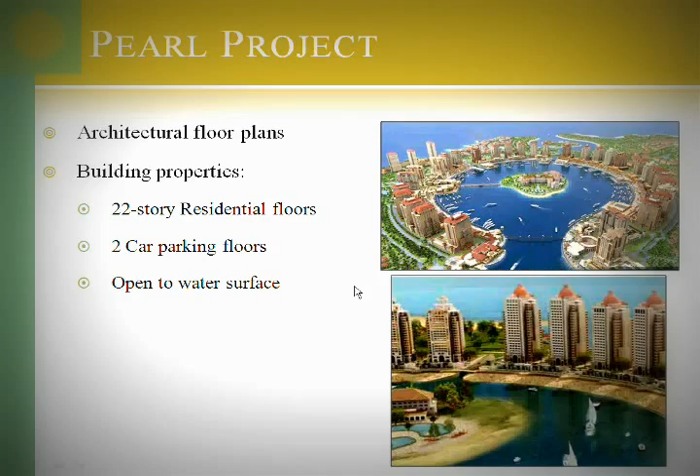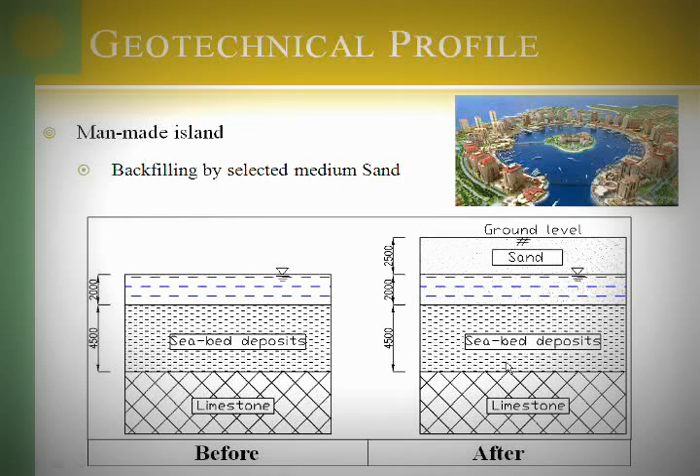This is a man-made island, exactly as shown in the before-lift picture. They filled that water with sand for around 2.5 meters. It was a seabed deposit, so to reach the rock, this layer was around 9 meters of sand to support your foundation, and this will be discussed in the foundation part.

We have 3 main parts in our graduation project: structural, foundation, and management. In the structural part, we did the design for the ribbed slab system in some floors, flat slab, shear walls as vertical members, which was a very important element, columns, stairs, ramps and bearing walls. In the foundation part, we analyzed the different foundation systems that may be used in this structure, and we showed how suitable each is for this building. Then we did a detailed design for the pile caps system chosen for this project. We also applied isolated and strip footing design in some small parts.

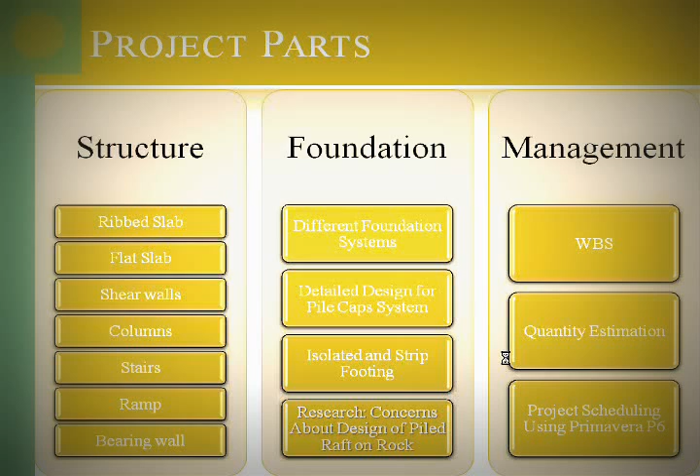At the end of the foundation part, we participated with Dr. Hisham in research about the concerns regarding the design of piled rafts on rock, which will be explained in this presentation. In the management part, we did a work breakdown structure for the building, the quantity estimation, and scheduled the project using Primavera P6, considering all the relations between the activities.

Starting with the structural analysis and design part, the design process mainly followed this diagram. First, we understood the architecture of the building, because we received a real design architecture with very complicated details, so we spent a lot of time understanding it. Then we moved to analyzing and designing the floor systems, the flat slab and the ribbed slab. After that, we developed the 3D model for the tower using ETABS, and checked the 3D model stability using stresses, effects on the foundation, and lateral drifts and deflection.

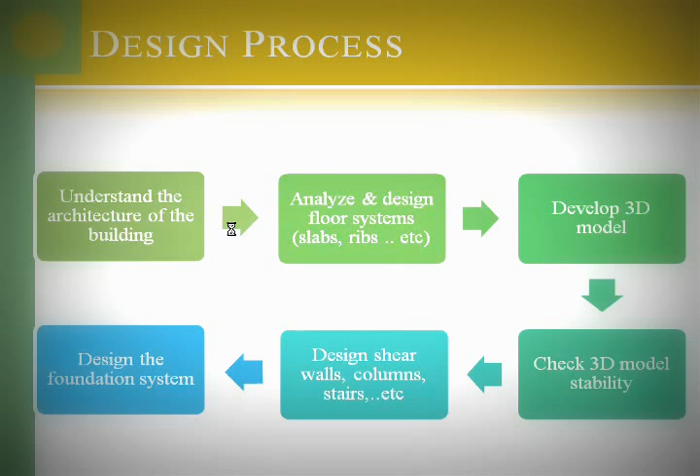After ensuring the structure as a mass was adequate for stability, we designed the vertical members, the shear walls and columns, and special elements like stairs or ramps. After finishing the superstructure design, we moved to the substructure design, the foundation system, which will be part 2 of this graduation project presentation.

I will move through the steps of the graduation project to show where we are. In the architecture stage, we understood the AutoCAD plans and concentrated on the main part that connects the structure with the architecture: the columns, their sizes and locations. From the architecture drawings, we got the design loads, which were used in the analysis of the slabs.

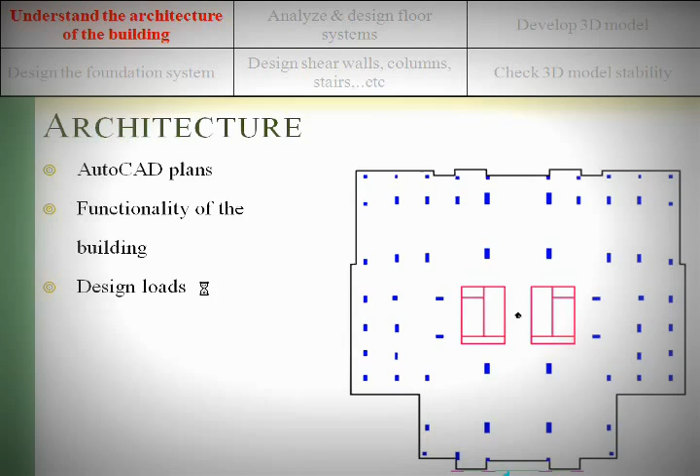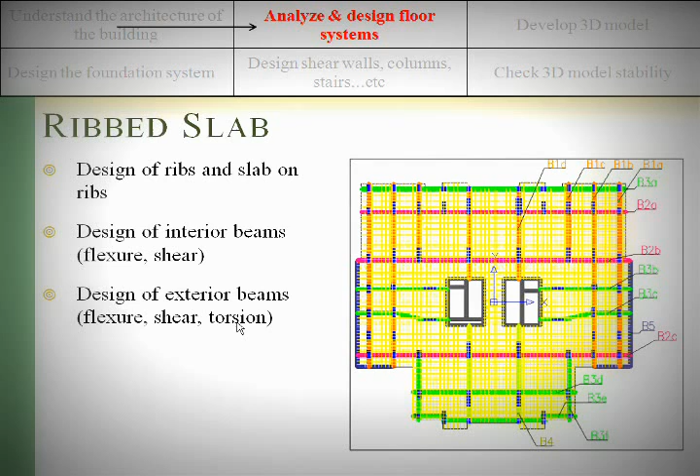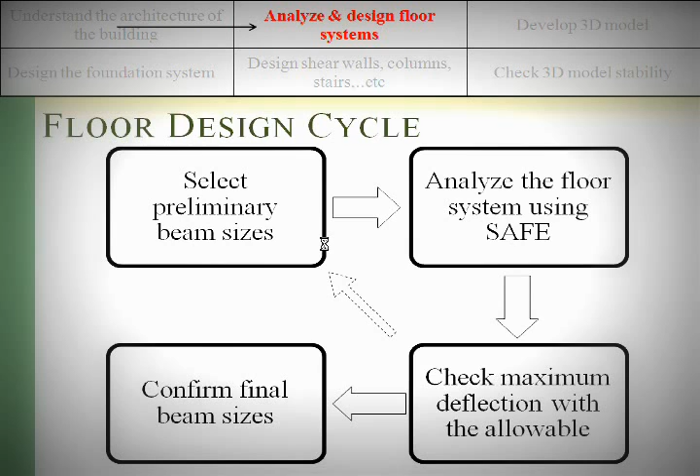We started to analyze and design the floor system. The first one was the ribbed slab, designed with different ribs and beams. The ribs were supported by the main beams; some beams were designed for flexure and shear only, and some, the perimeter beams, were also designed for torsion. The floor design cycle started by selecting preliminary beam sizes, analyzing the floor using SAFE, checking the maximum deflection against the allowable, confirming the beam sizes, and then proceeding to reinforcement. This is the SAFE analysis and the ribbed slab system used in this floor.

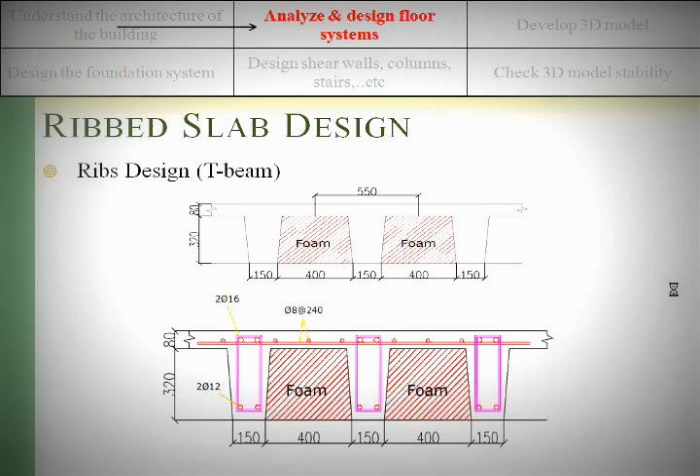This is the general detailing of the ribbed slab. It was designed as a rib, as a T-beam. This is a sample of the exterior beam, which was designed to resist flexure, shear, and torsion.

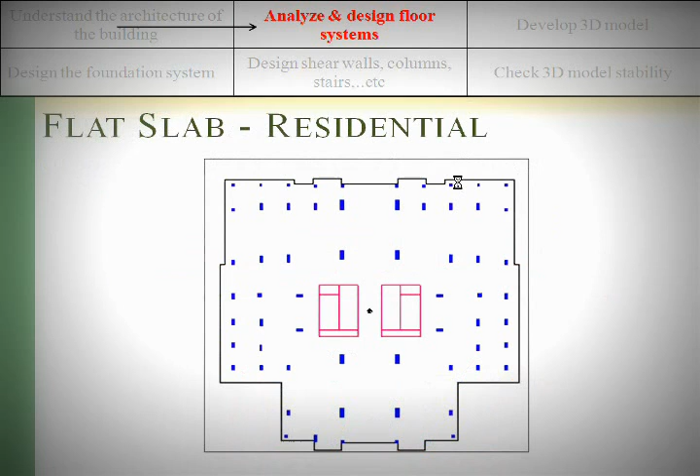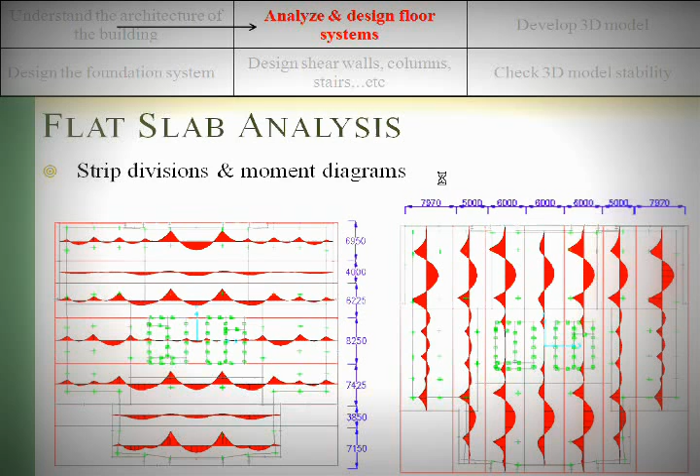This is the next slab system, which is the flat slab residential system. You can see the strips that we have divided to design the flat slab. Actually, we have an irregular shape, so we use SAFE to analyze the strips.

Also, for the punching shear check, we get the critical points, and then we check it manually to know if the slab will be adequate to resist the punching shear. This is a general detailing of a section of the flat slab.

For the 3D structural system, this is the important part. We have designed it for wind, and the main member to resist the wind was the shear walls. This system was mainly used because we have huge shear walls compared to the columns. So we have neglected the rigidity of the columns, and we consider that the rigidity is connected with the diaphragm action to the shear walls only. And the columns have been assumed to be a pinned end.

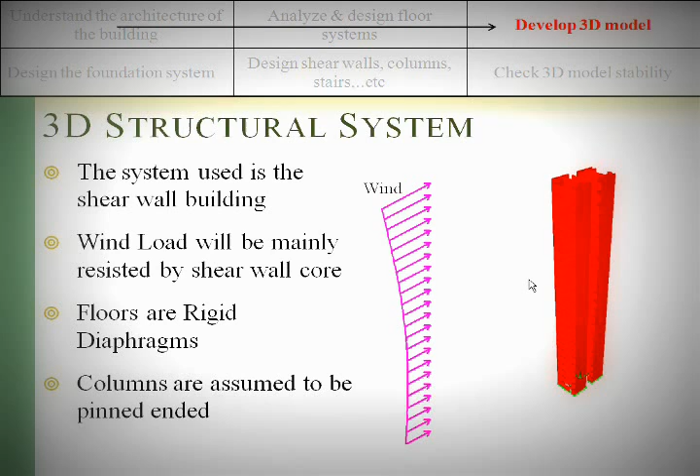This assumption is debatable, but some professors really agree to assume the concrete connection, which is not detailed with special detailing, as a pin. If some structures need special detailing for a rigid beam-to-column connection, I will present that in a different presentation, but assuming a pinned column is more conservative.

Why should we do a 3D modeling? This is the question that is always asked. Why should I make a 3D model? First of all, to check the stability of the structure, the deflection and drift values, and to get the column loads and shear wall loads when the wind is applied. Also, if you are applying seismic, or blast, or any other load, the results will be different if you analyze it as 3D versus 2D.

After that, we will get the reactions, and we will transfer them to the foundation system.

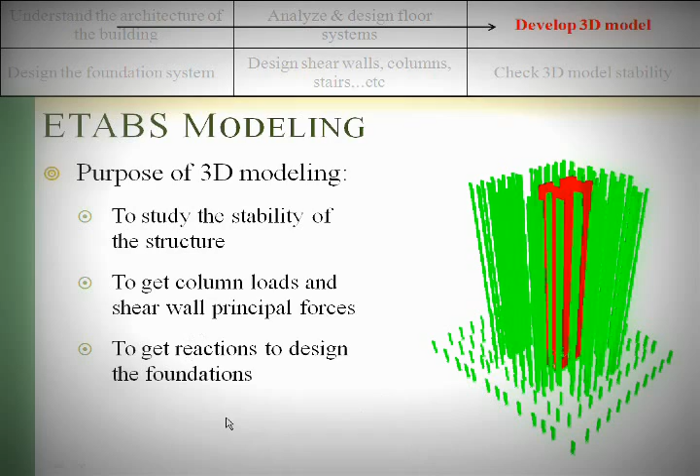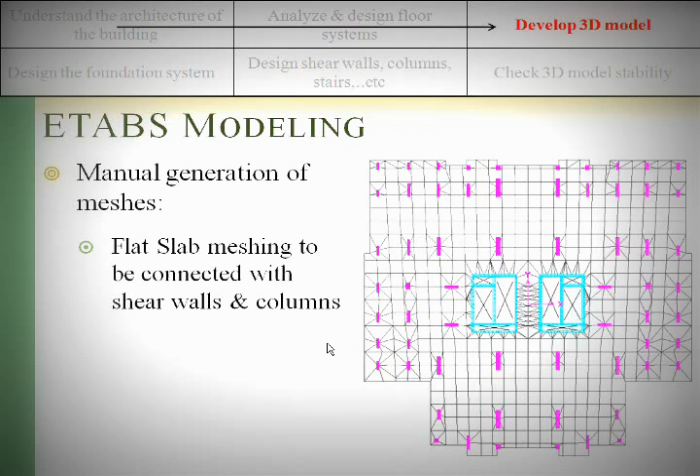The ETABS modeling was a very important part of our presentation, our project, because we have used manual meshing to mesh the slabs and connect them with the columns and the shear walls. This was a very important step to assure that the finite element software is working properly.

In the ETABS modeling, we also used the piers and spandrel system, where the spandrel transfers the load horizontally to the piers, and the piers act as vertical members to take the loads down to the floors below.

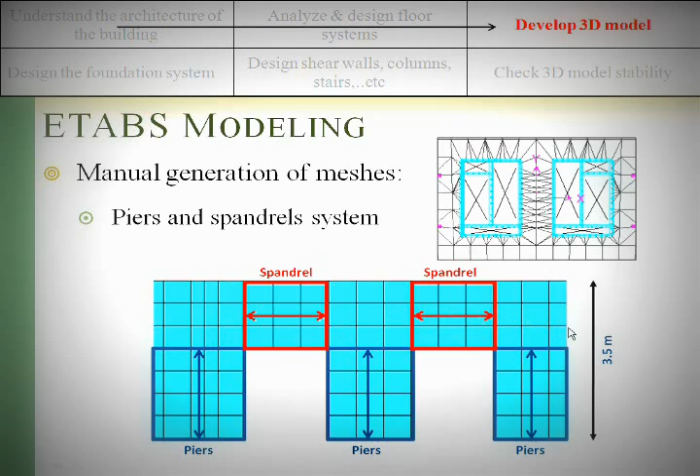The load combination that we have taken is based on ACI 2005.

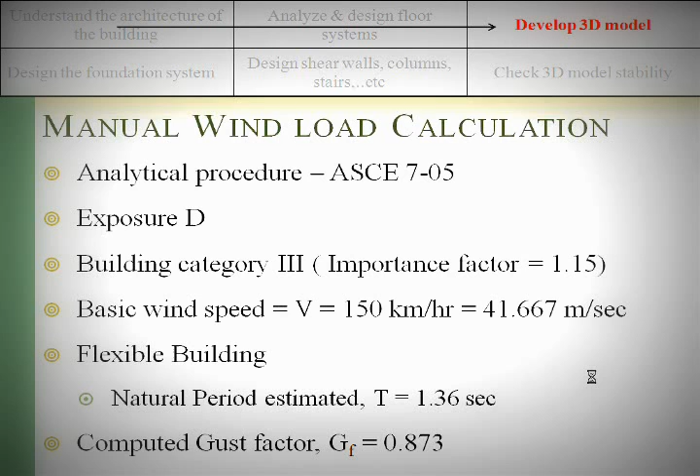In the manual wind load calculation, we have taken exposure D because the structure was open to the water surface, and we have taken the building category as 3 because the importance factor is 1.15, since it will be full of people. The basic wind speed, as discussed with major consultants in Qatar, is 150 km per hour, or 41.7 meters per second. Because the building is around 23 stories, it was empirical to calculate that it's a flexible building in the dynamic analysis, and the natural period estimated was 1.36 seconds. The computed gust factor was equal to 0.873.

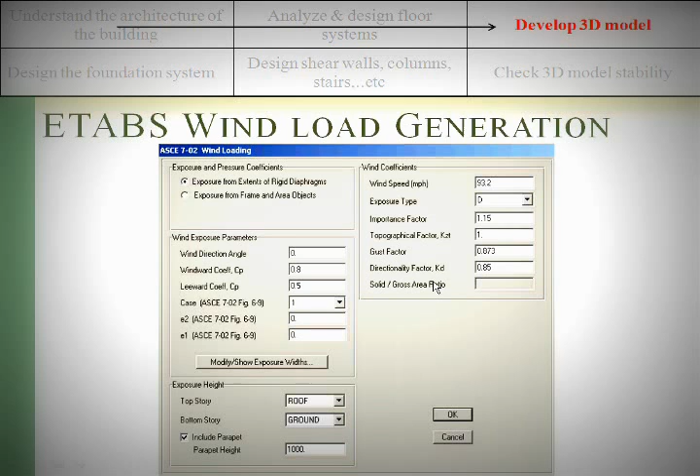ETABS generates the wind load automatically, so we used the ETABS command to check our manual calculations, inserting the CP windward and leeward coefficients. We considered only one case, the most probable and critical case, taken from the ground to the roof including a parapet of 1000 millimeters, with the wind speed chosen in miles per hour, along with the exposure, gust factor, directionality factor KD, and topographic factor KZT equal to 1.

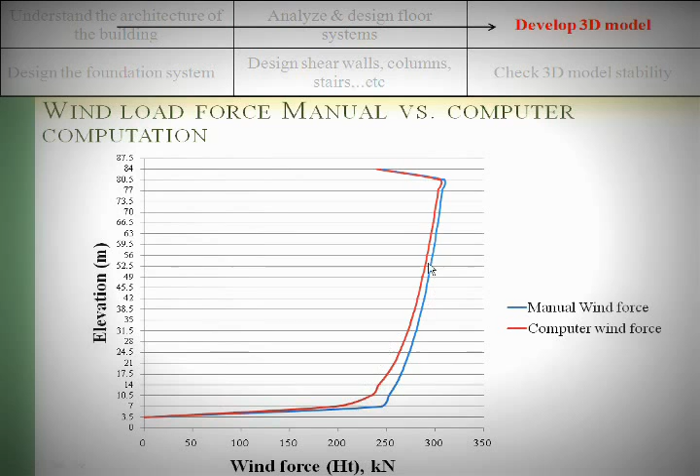This is a comparison between the manual and computer wind analysis calculations. You can see this axis is the wind force per floor in kilonewtons, against the elevation. As you can see, the values are very close, and this is why we are assured that our values and results are true.

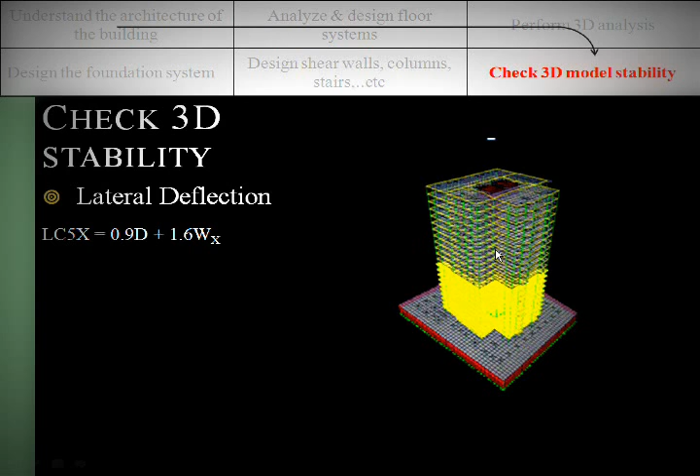Also, after that, we can check the lateral deflection check, the drift, with the maximum deflection per the total height. The maximum deflection we get is around 56 millimeters over the 84 meters, and the ratio is less than the 1/500 specified in the code.

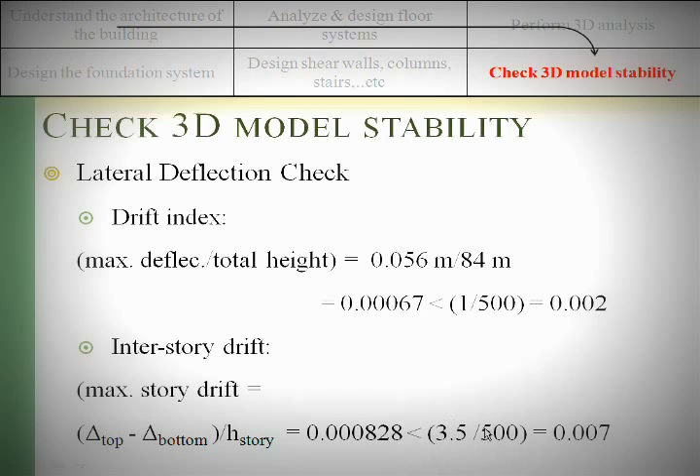We have also checked the interstory drift, which is the maximum deformation at the top of the story minus the deformation at the bottom of the story, divided by the height of the story. You get this value, which is 0.00082.

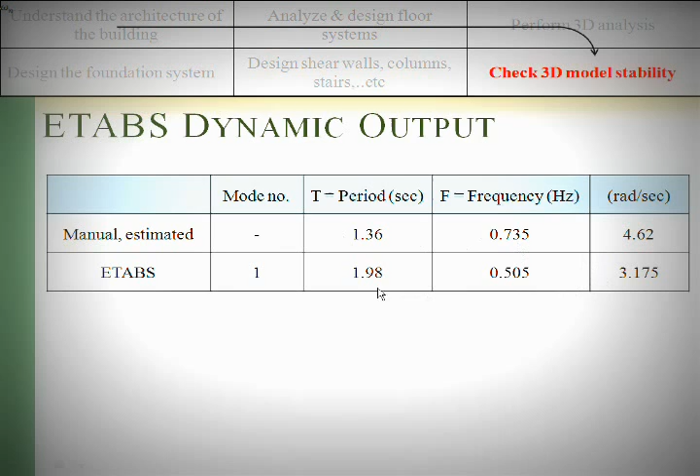This is less than the interstory limit, which is the height over 500. This is the dynamic output from ETABS. It gave a period time of 1.98, which is more than what was calculated using the empirical calculation. This is because ETABS considers all the geometry of the building in its analysis, so the period is usually bigger in finite element software than in empirical values.

Now we reach the design of the most important part. As you can see, we have understood the architecture, analyzed the design and the floor systems, performed the 3D analysis, and checked the 3D model stability.

After that, we move to the vertical members, starting with the major part of this building, which is the shear walls. We divided them into different piers, but it was designed as one core, considering all the loads and all the principal forces.

We consider the axial load coming to each pier, the moment on the strong axis, the moment on the weak axis, the shear in the strong axis, the shear in the weak axis, and the torsion. To design all of these values at once for each floor, for each pier, for each load combination, would take an enormous amount of time to present.

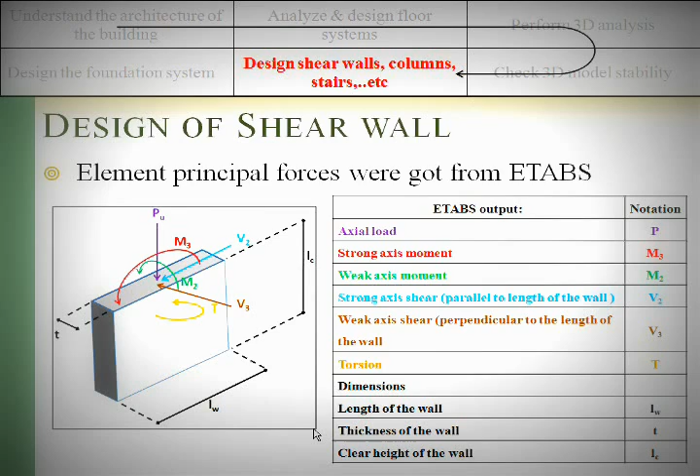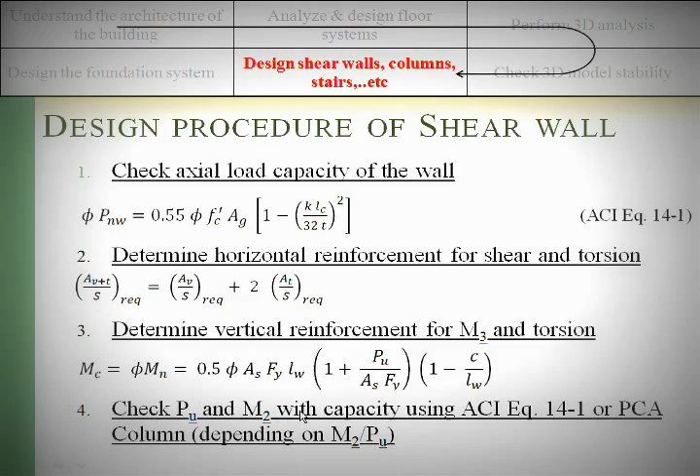So this is why we put in all the equations used in the design to check the axial load capacity and determine the horizontal reinforcement. Using this horizontal reinforcement we can determine the vertical reinforcement using the maximum moment, the strong axis, and the torsion. After that we can check the axial load with the weak axis moment to see if it is covered or not.

To do this, we developed a macro function. It was a very unique Excel function, easy to use to import the data from ETABS for all the principal forces and copy it into equations that design the shear wall for each floor, for each load combination.

It's not always critical to take the maximum axial and maximum torsion, maximum shear, maximum moment, because sometimes the axial load is helping the design of the shear. So we have to design it case by case, load combination by load combination, story by story.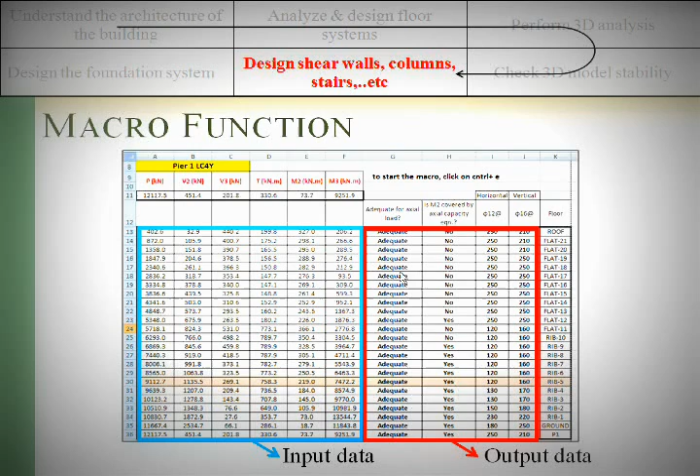This is why we developed this macro function, and it was very efficient to give a huge amount of data in a very fast time. We analyzed the shear walls using ETABS, exported them as a text file for all load combinations.

Then we copy all wall forces into an Excel file, which is prepared to take this text file from ETABS. These forces are copied into the macro function for each floor, for one load combination, and then we run the macro and get the design results.

We apply this for all load combinations and then take the largest amount of rebar depending on the load combination. We group the floors according to the rebars and go for the detailing.

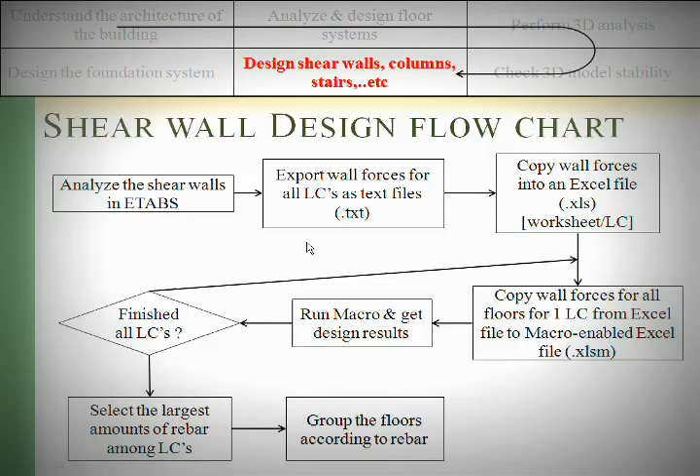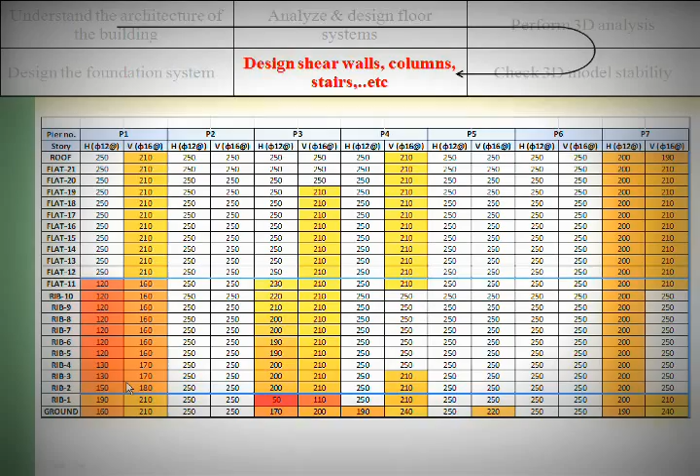Now we reach the column design. We designed the columns as pinned columns, and this assumption is very conservative because you are taking all the loads to the shear walls.

We had a lot of discussion about this, and we will have a separate presentation clarifying the problem of rigid connection versus simple connection for the beam or floor-column connection, and why we can or cannot use a pin column connection in concrete structures. This will be displayed in a separate presentation.

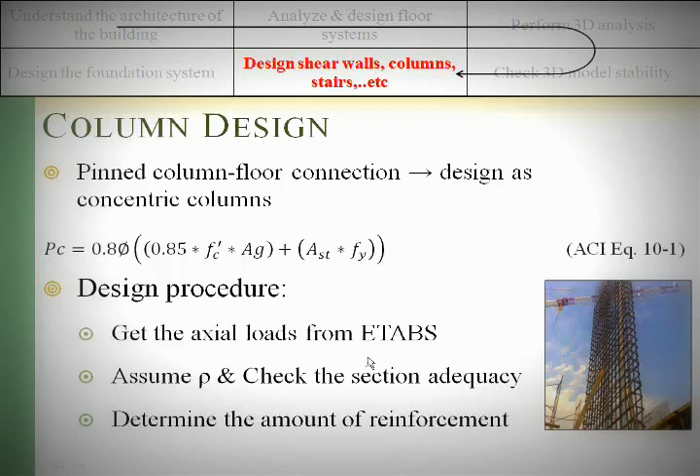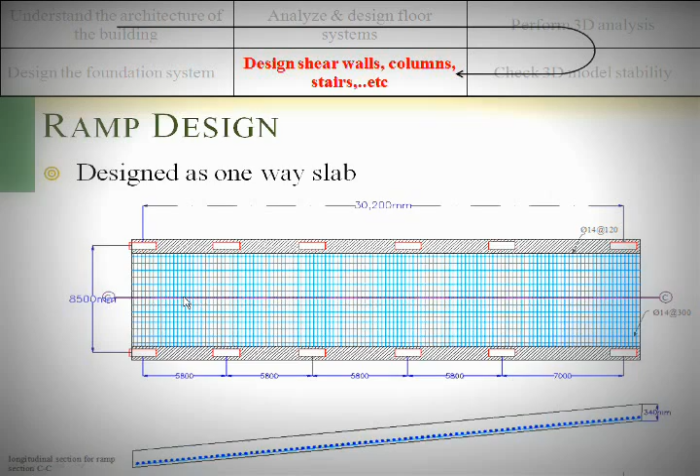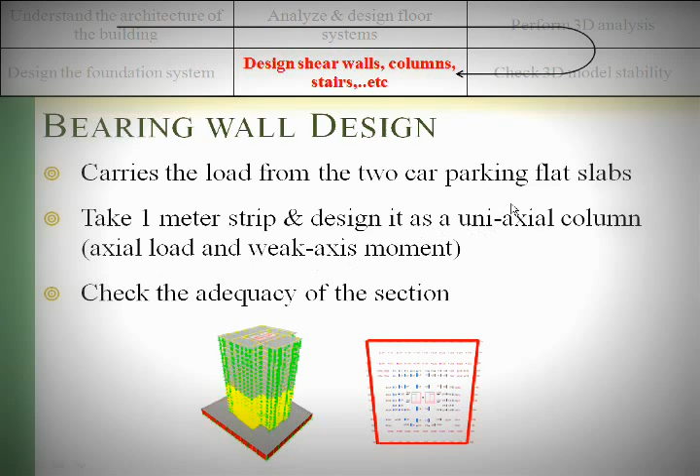We have also designed one of the bearing walls. This bearing wall was surrounding the building. It was designed for a moment on the weak axis per meter, and this is the general detail of this bearing wall.

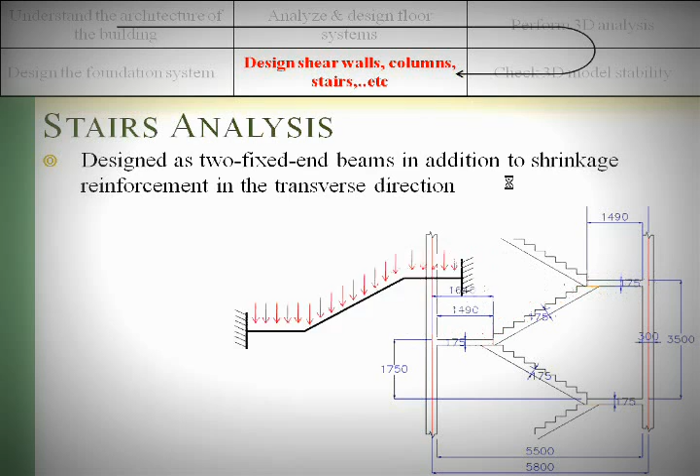The stairs was a very nice structure, which we consider as fixed with the shear walls in order to minimize the moment, and we get the negative and positive values using STAAD software, then we design this stair as a continuous beam supported on the shear walls.

As you can see, this is the negative reinforcement that is detailed in a very correct way, because we have to make sure that all these junctions are available and able to resist this tension.

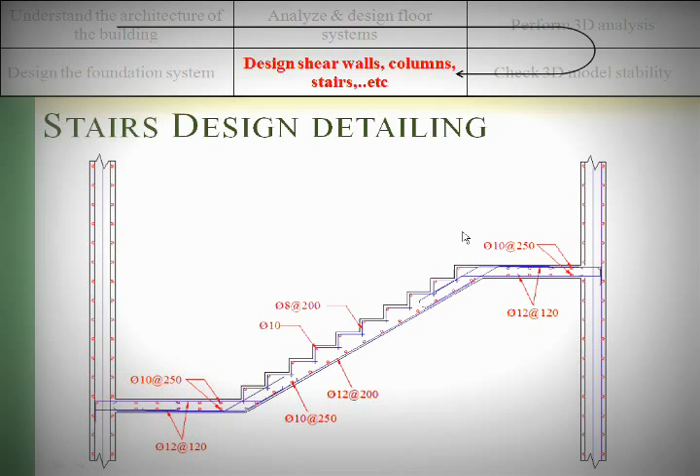Now we reach the foundation analysis and design part. Mainly we have 4 divisions in this part.

The first one, we will explore how we checked the foundation system for the tower. We have checked the raft only, and we showed if it is available or if it will be okay to design as a raft or not, and then we will go for the pile raft, and then we will use the pile cap system, and it will be illustrated.

The car parking foundation system, which is just a 2-story building, we have used the isolated footing and strip footing. And in the research part, we check the pile load share research, which describes the concerns about the design

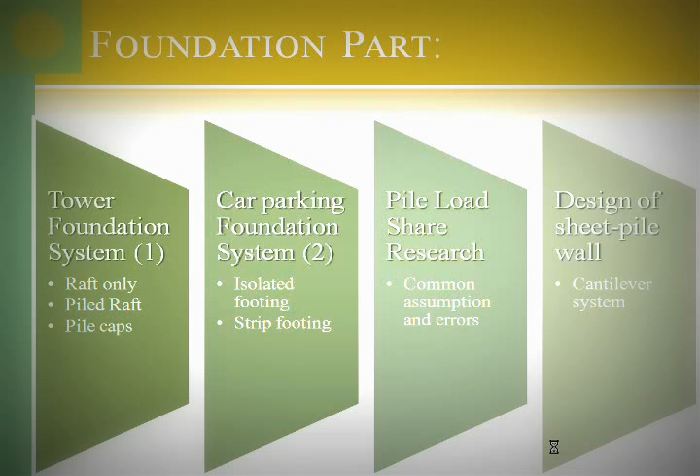of a pile raft on rock, or on piles that are socketed into rock. It will explore the concerns and errors that can occur in estimating the subgrade reaction and the pile spring constant. As a final part, it will be the design of the sheet pile wall, which is

using the cantilever system. Here, as you can see, this is the tower area, and in this tower area you can see that we will use the high capacity foundation system, and this is the car parking area, which uses the spread footing and strip footing for the foundation.

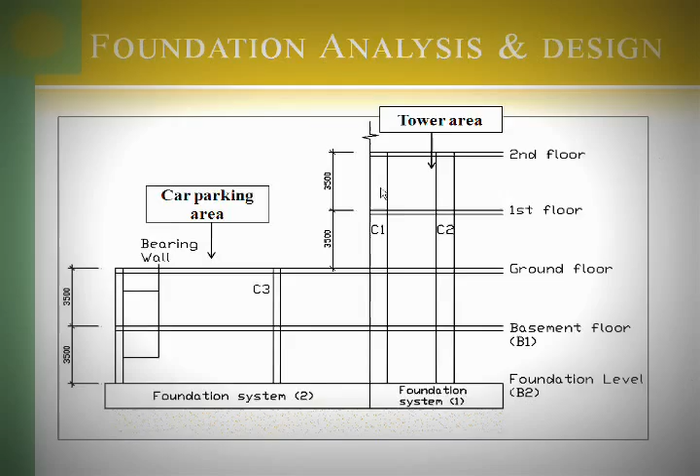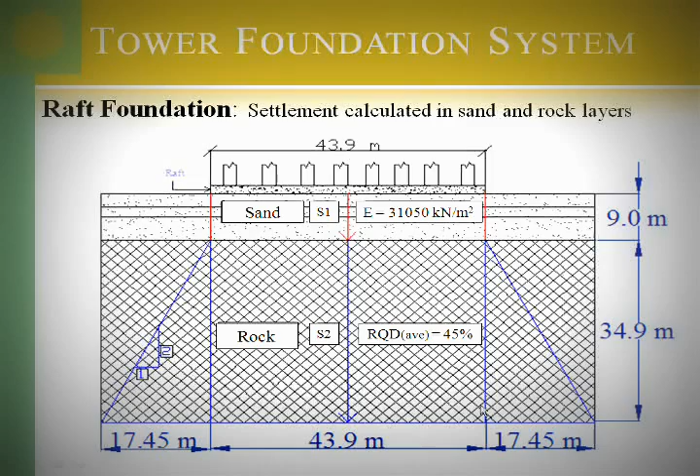For calculating the raft foundation, if we want to do a raft, we have to check the settlement. We assume this is sand because it's a man-made island, and we have about 9 meters of sand. Then the rock starts with an average RQD of 45%. When we check the settlement, the sand settlement was 7.1 centimeters and the rock settlement was 8.5 centimeters.

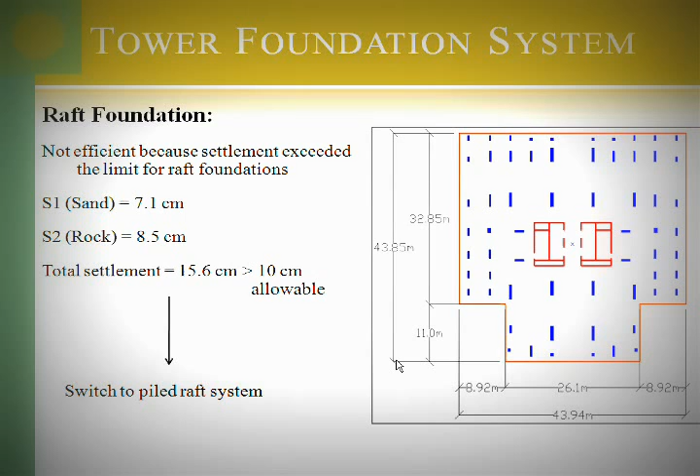The maximum allowable settlement in the raft is 10 centimeters, and it will not be allowed to use the raft foundation in the system. We showed all the details and calculations to show that it will not be adequate for this system, so we switched to the pile raft system.

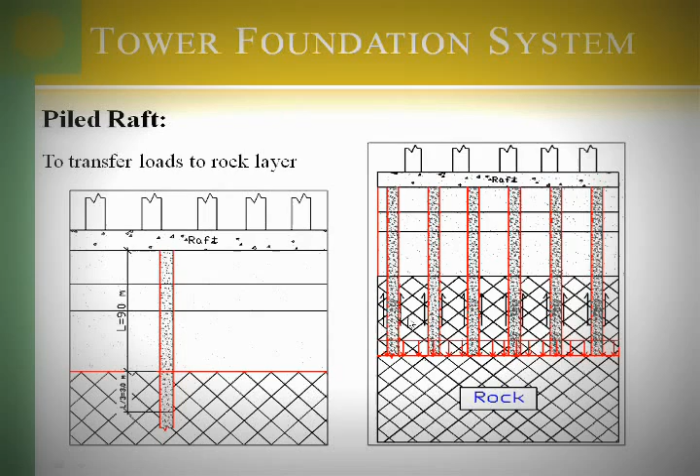The pile raft system: the first step in the procedure is that we have to calculate the pile capacity. To calculate the pile capacity, we have to know what rock is surrounding it and the friction with the rock, and how we are going to transfer the load of the raft using the piles to a

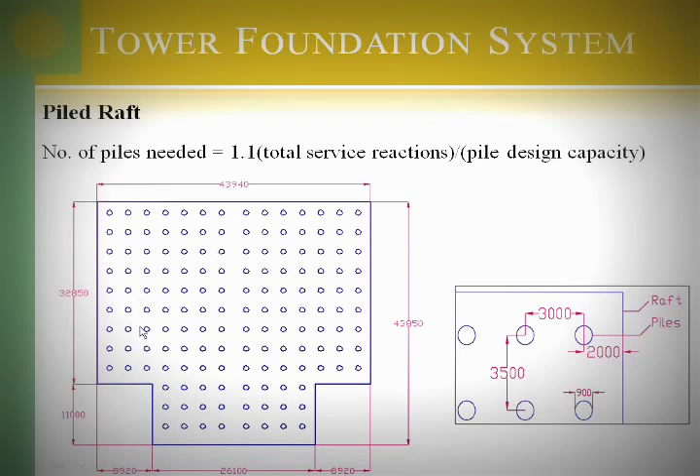stiffened strata of the rock. To estimate the number of piles, if we want to use just a conventional pile raft, we will know what the total service reaction is, and divide it by the pile design capacity. We can check how many piles, and we distribute it equally.

But we had a problem: some of the columns are concentrating more load on some piles than others. For example, if we take this column, it's putting more load on this pile, so this pile is not adequate, and it is not distributing the load of this column to all piles, even if you used a rigid raft.

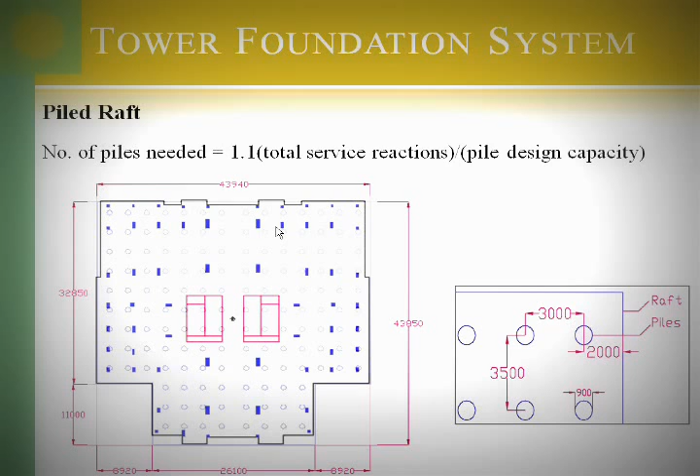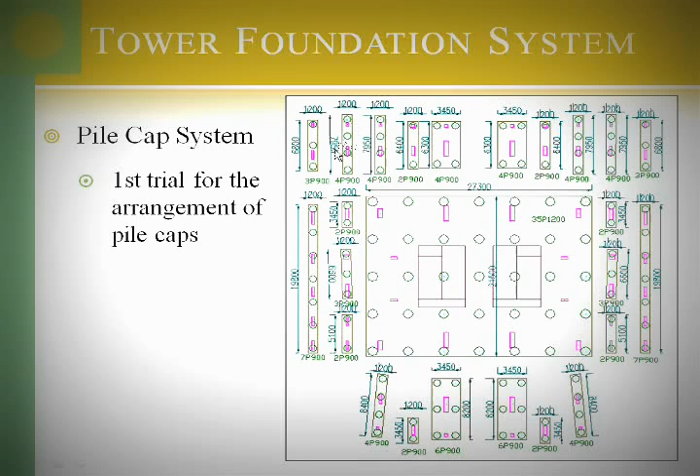So we tried to go to the pile cap system. The pile cap system allows you to group the columns. We use the middle raft to take the shear walls and the major columns, and distribute it to the piles, and for the other columns we can put the pile cap system for each column. Also, we have some problems with this.

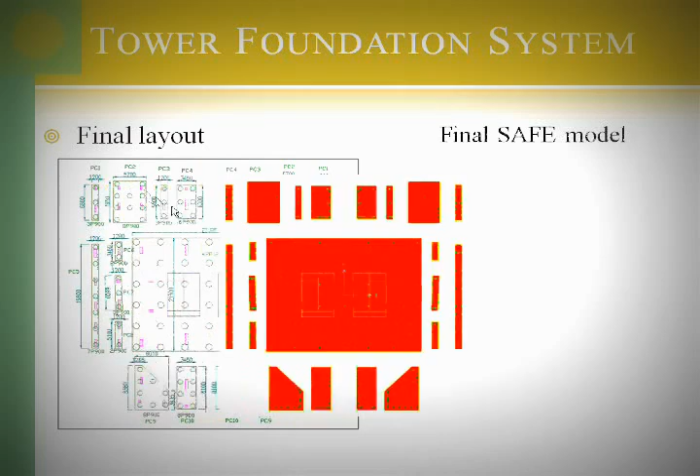We have to increase the thickness of the pile cap, or increase the number of piles. The final layout that we reached, with the number of piles for each column, as you can see here, will be a raft with a 50 centimeter border surrounding these pile caps.

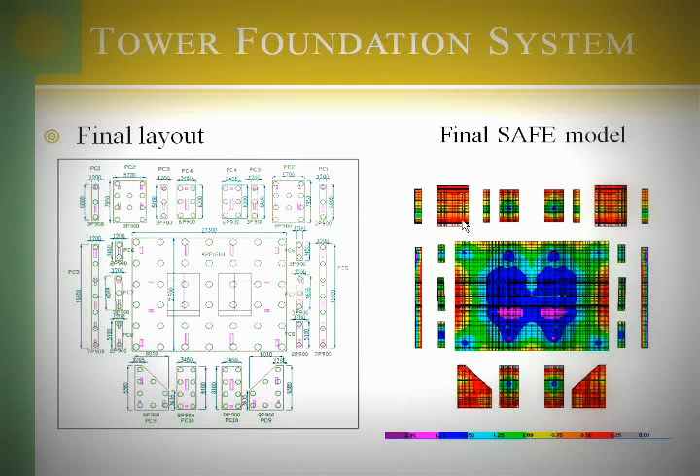This is the SAFE model, and we have checked that the reaction coming to the pile is less than the pile capacity, and this will be an adequate design.

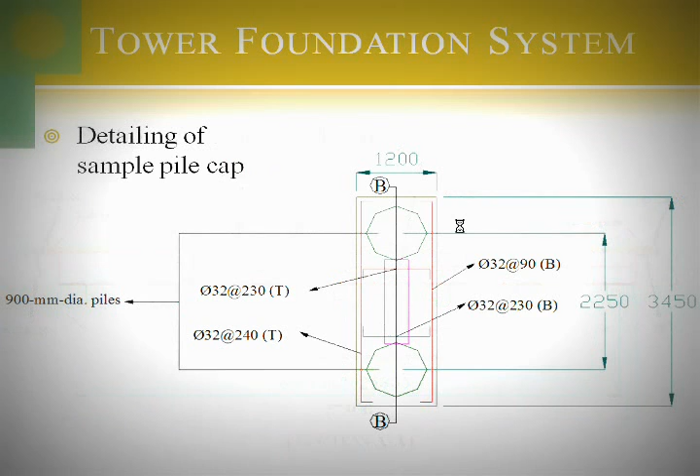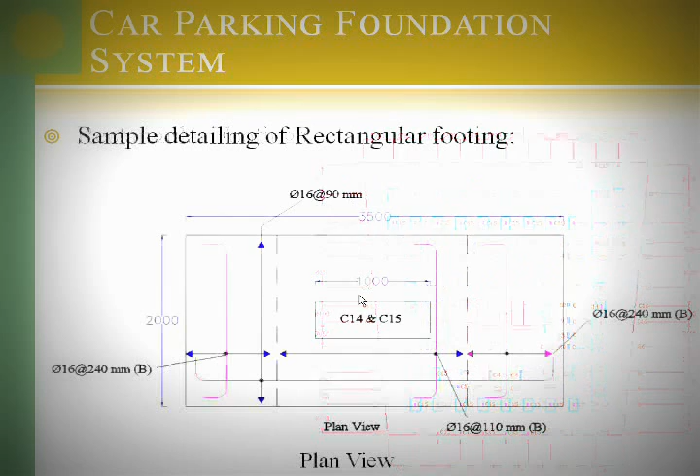We have used rectangular footings, and these footings were surrounding the car parking area. This is a sample detailing of the rectangular footing.

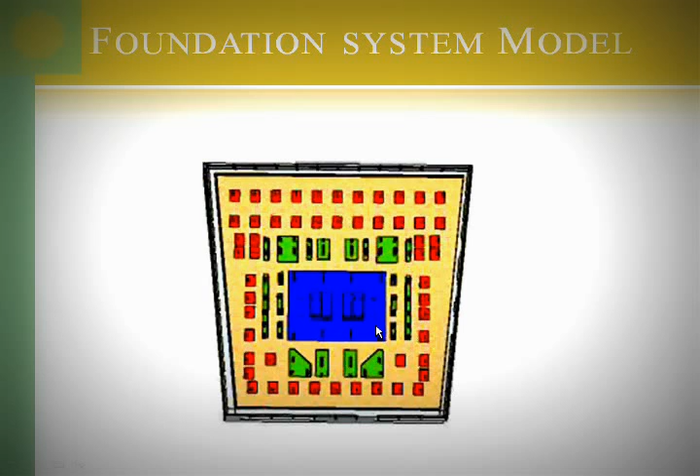We have also used a wall footing for the bearing wall with a very simple method for designing the strip footing. A video was prepared in the graduation project to model the foundation system in this structure, and it will be shown in a separate video.

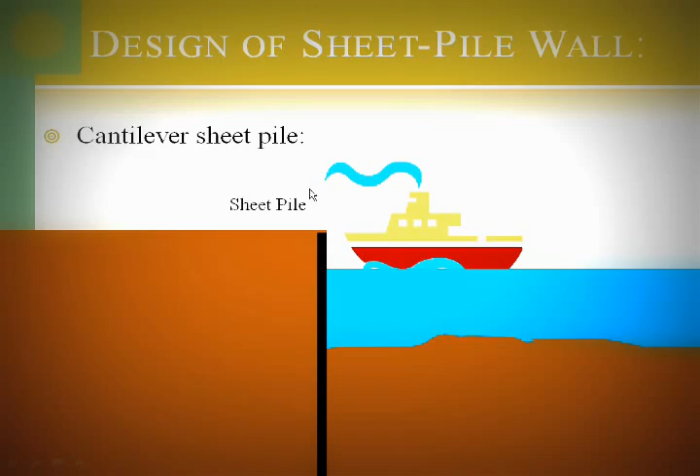This is the cantilever sheet pile. We have proposed that we can put a sheet pile to resist the soil, and we can use this system as a marina. This sheet pile can be very easily analyzed using the earth pressure calculation. As you can see here in the figure, we can calculate the earth pressure from the soil and the water, and we design this sheet pile as a cantilever sheet pile.

We have chosen to do this sheet pile as contiguous piles because we are not required to make it impermeable. We can let the water go because it's already surrounding the pile sheet.

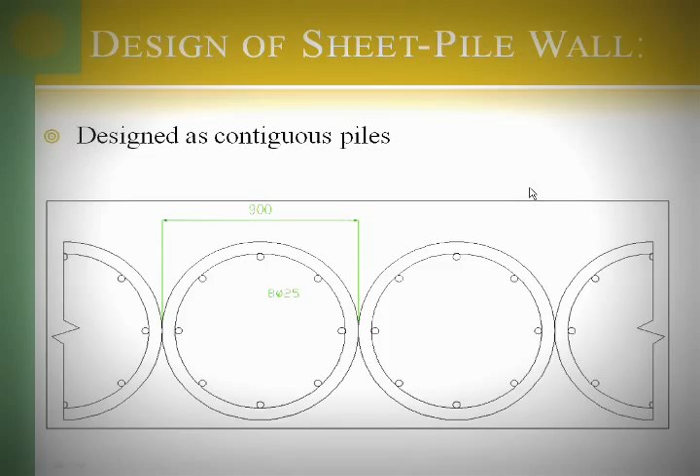Now we have reached the research and geotechnical concerns about the design of the pile raft on rocks. We know that we have two concepts in the design of the raft on piles. The first one is the conventional concept, which assumes that the stresses coming from the raft are distributed to the piles directly, with nothing sharing the loads from the surrounding soil or rock.

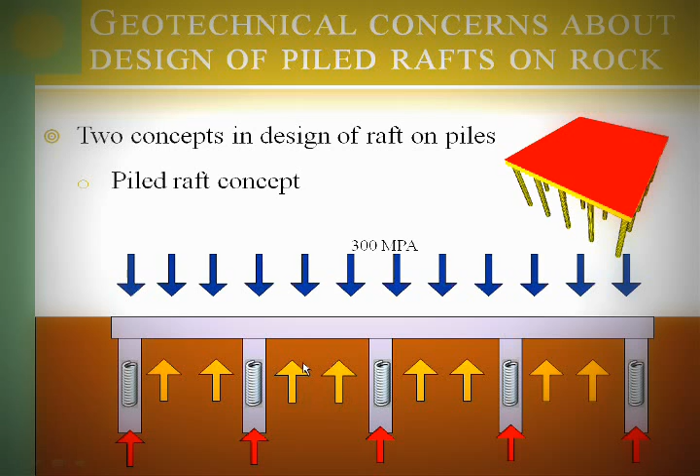The other type is the pile raft concept. The pile raft considers the spring constant of the pile and the subgrade reaction of the rock. In these two models for this raft foundation, we are assuming the modulus of subgrade reaction, and we are assuming the pile spring constant.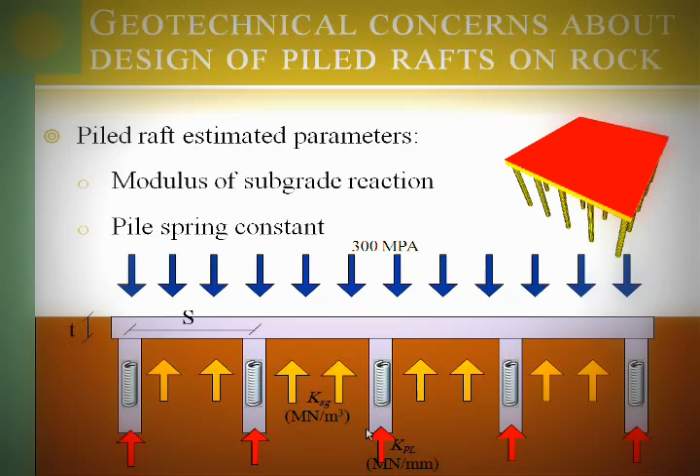These values have some ranges, and if we assume them in some way, we can affect our design. This is what the research is exploring.

What we did: we know that the subgrade modulus of the rock, for example, ranges from 150 to 300 in Qatar, and the pile spring constant ranges from 4.5 to 9 meganewtons per millimeter, depending on the RQD of the rock surrounding the pile. We used some raft foundations with a spacing of 3D up to 6D.

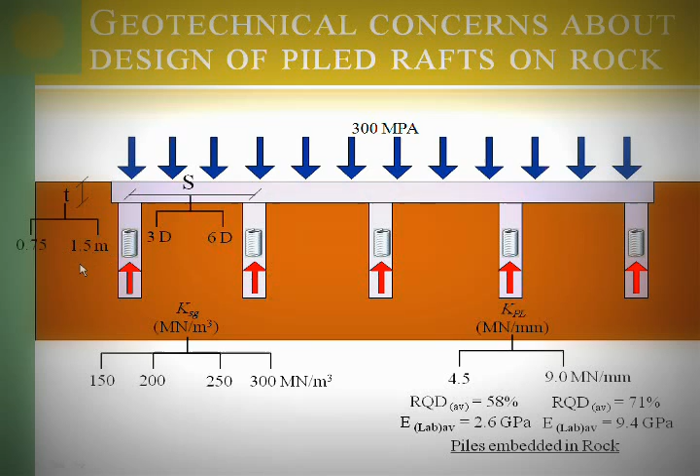We can use a thickness of 0.75 or 1.5 to model or simulate the thickness of the raft, whether it's a rigid raft at 1.5 or a flexible raft. We have considered two types of piles.

The piles which are embedded in the rock, fully embedded, as in the case of Qatar in the Corniche. Depending on different RQD values, we can get different pile spring constants.

There is another type, the pile that is socketed into the rock, which is the system used in the strata of other countries, not here in Qatar. Some areas like the Pearl Qatar or the New Doha International Airport have this same type of pile, but in the Corniche area the piles are fully embedded in the rock.

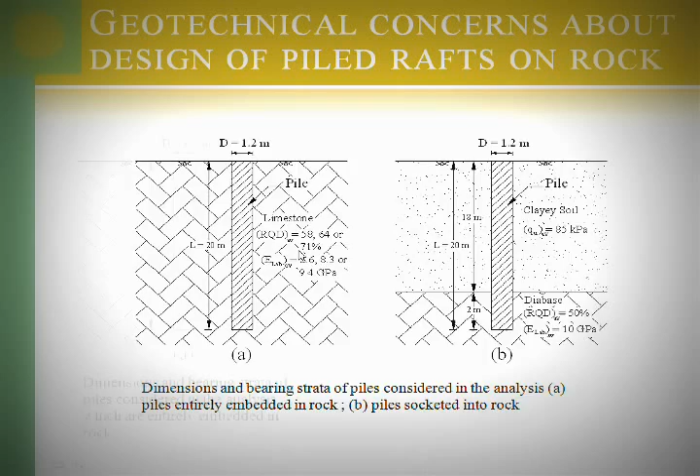We have taken this spring constant and checked all these values for all cases, to describe the errors that can result from overestimating or underestimating either the spring constant or the subgrade reaction. To calculate the pile spring constant, we can go to the pile load test, and using the load we can take the slope.

This is the range, and it can be 9 meganewtons per millimeter. If we go for another RQD, we can reach 4.5 for the same pile embedded in the rock. So these ranges can differ and affect the results of the design.

If we assume that the pile is 4.5 and then we reach 9 meganewton, the pile will take more load and maybe it will not be adequate to resist this load.

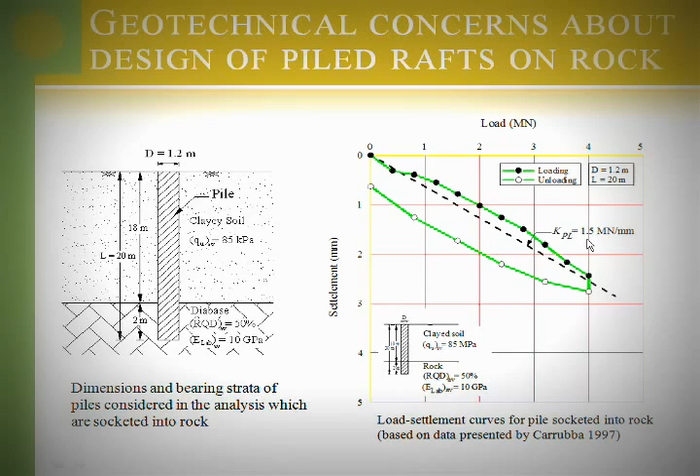For the other case, where the pile is socketed into the rock, we calculate the pile constant, which is 1.5 meganewton per millimeter, and this is the difference using 1.5 also for 3D and 6D. As you can see, in the 6D you have difference even for the rigid raft or the flexible raft.

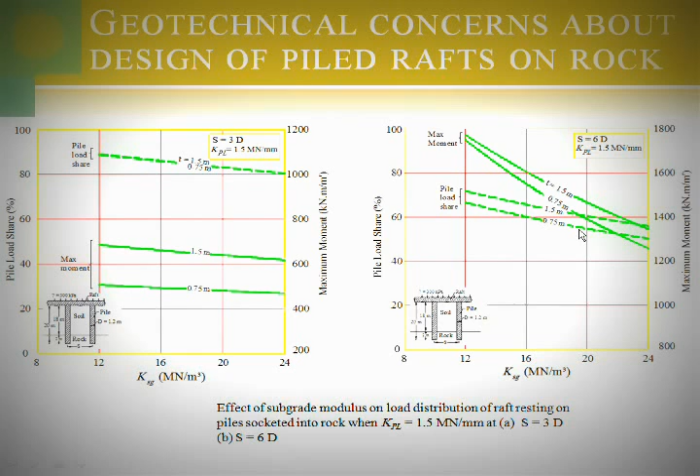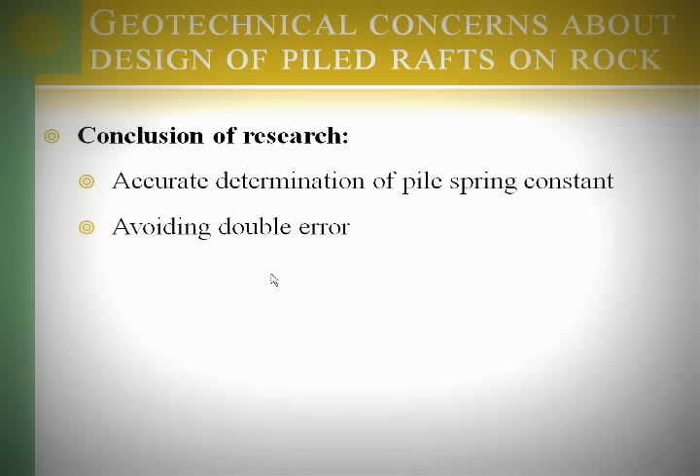Conclusion of the research: you have to make an accurate determination of the pile spring constant and the subgrade reaction. We can do the pile load test before the design stage, before we finalize the design, because it will affect the design of the foundation. So avoiding double error is much better than doing double error, or making one error is better than doing double error.

The last part of our graduation project is the project management and scheduling for the project. We have 4 divisions: the work breakdown structure, the quantity estimation, the cost comparison between the ribbed slab and the flat slab, and the project scheduling using Primavera P6.

The first one is the work breakdown structure. As you can see, the project is divided into site preparation work, substructure, superstructure, and the marina. For the site preparation, we need mobilization and surveying, and for substructure we need piles and foundation work. In the superstructure, we go for car parking floors and the ground floors up to floor 22.

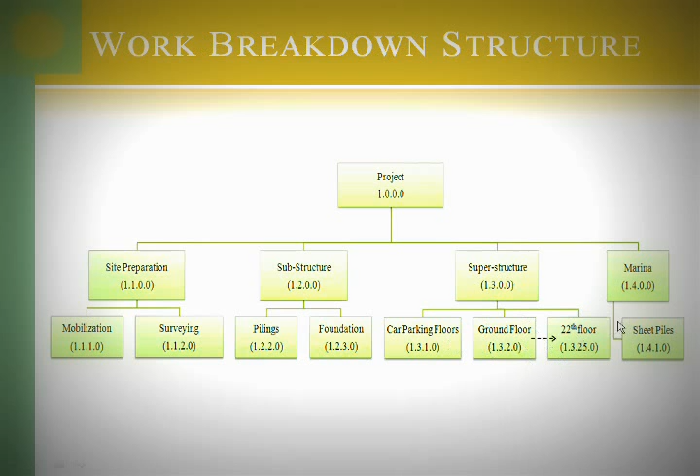In the quantity estimation, we need the materials: the concrete, we have around 7,500 meter cubic, the concrete 40, the concrete 50, and the steel - we calculated the total amount, and the vertical formwork, the horizontal formwork.

The labors we need: mason, vibration, steel fixer, carpenters. We have only calculated the labors and material related to the structural members. We did not include the architectural members or any mechanical equipment that will be on the site.

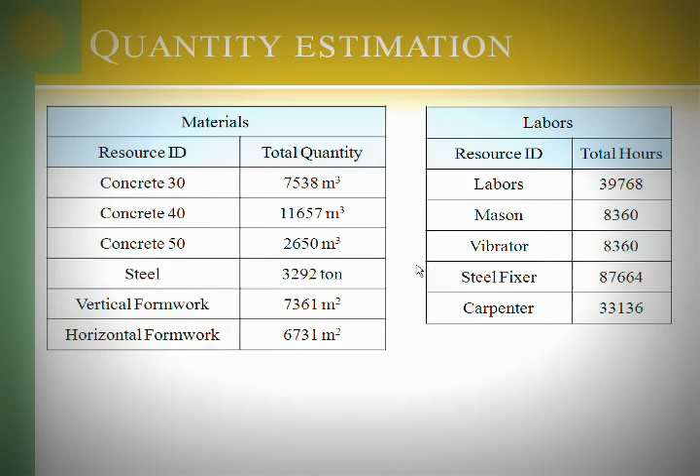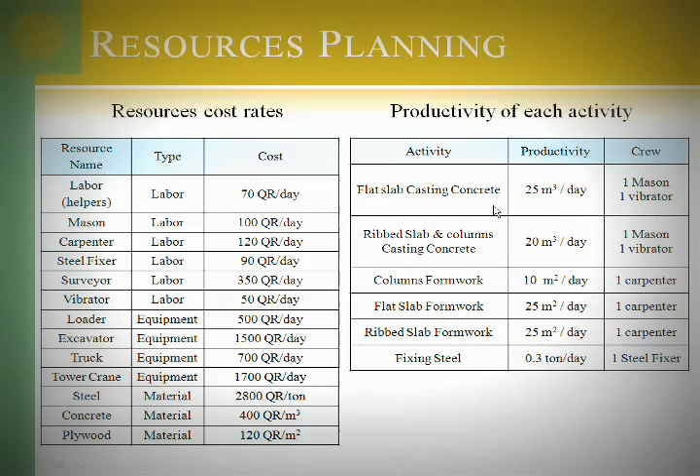We compared between the ribbed slab and the flat slab, fixing the duration and playing with the labor that can be used or the cost. We can compare the activities of ribbed slab and flat slab if we either fix the duration or fix the labor numbers and productivity. So we fixed the duration and compared the cost between the flat slab and the ribbed slab.

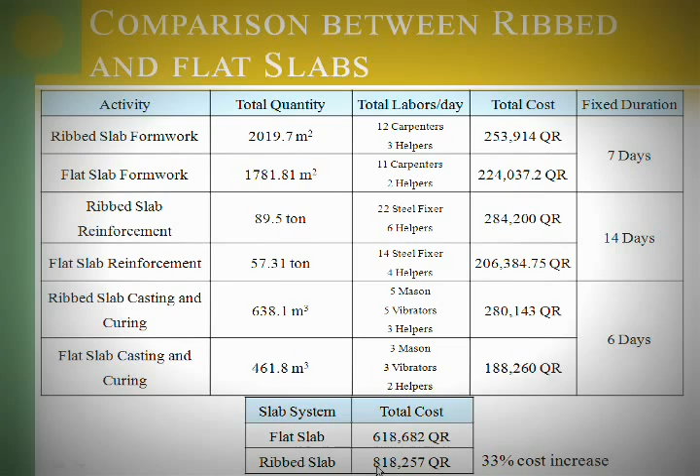The ribbed slab was a 33% cost increase, and this is because the ribbed slab is full of ribs and formworks, and this will be very costly.

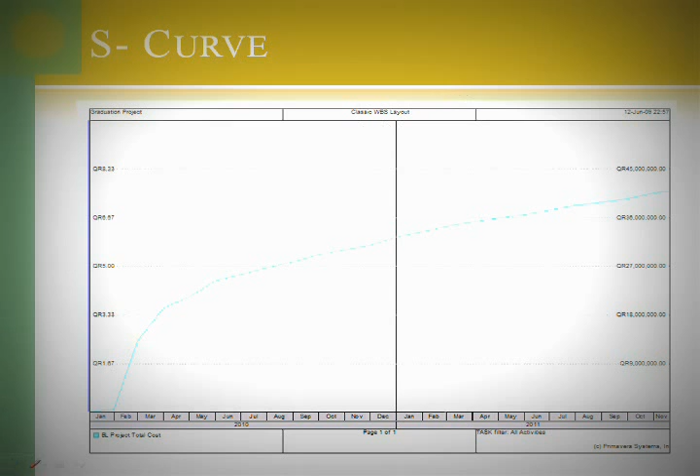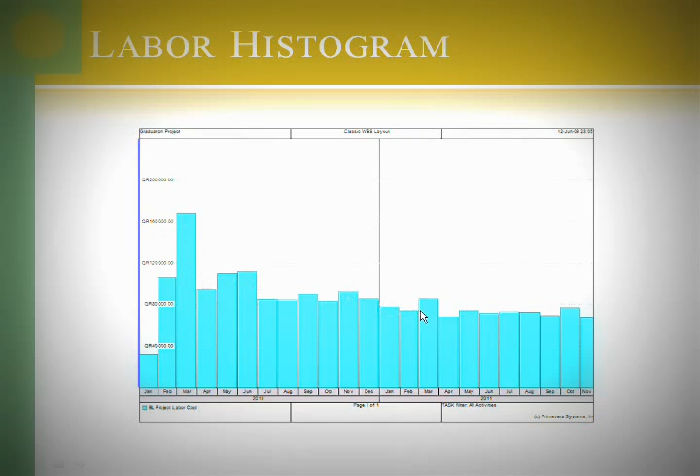For the structural members only, we calculated the cost, and it will reach 40 million Qatar Riyal. The total duration for structural members only is around 2 years. This is depending on one shift, depending on a certain number of labors, not a huge number. The starting date will be whatever, and the completion date is whatever.

Project conclusion: we have applied the theoretical knowledge into a real project with real architecture constraints, and we have worked and followed the design codes available in the field. We have improved our engineering skills, our self-learning, our time management. We know how to work in a team. We know how to manage our conflict, and we know how to solve the problems that we face in the project. We are very happy with this project, and we did a great job.